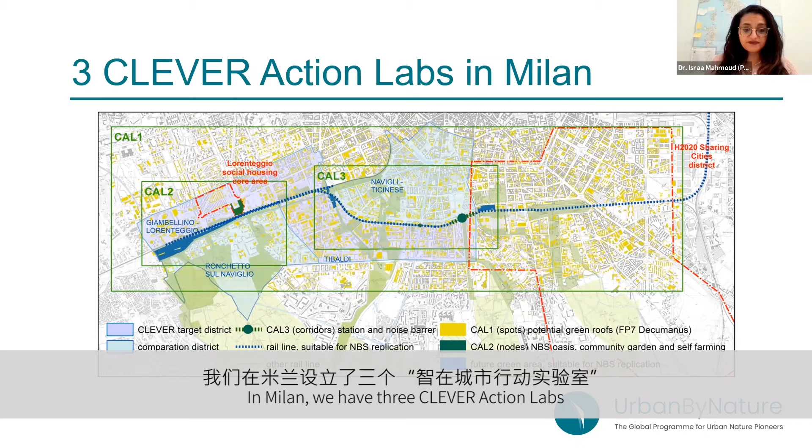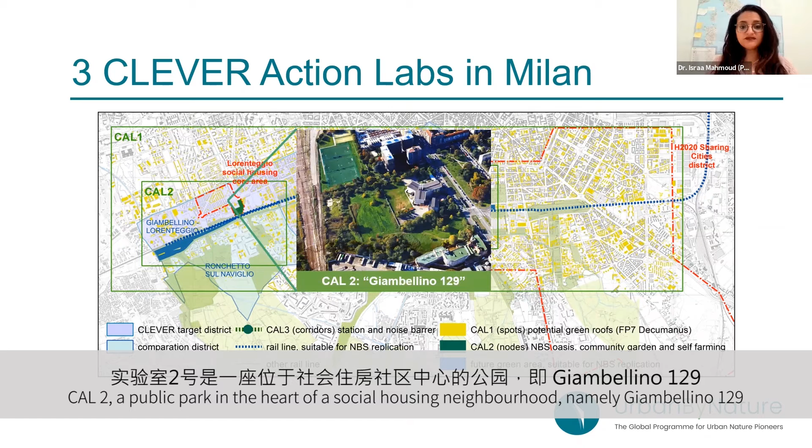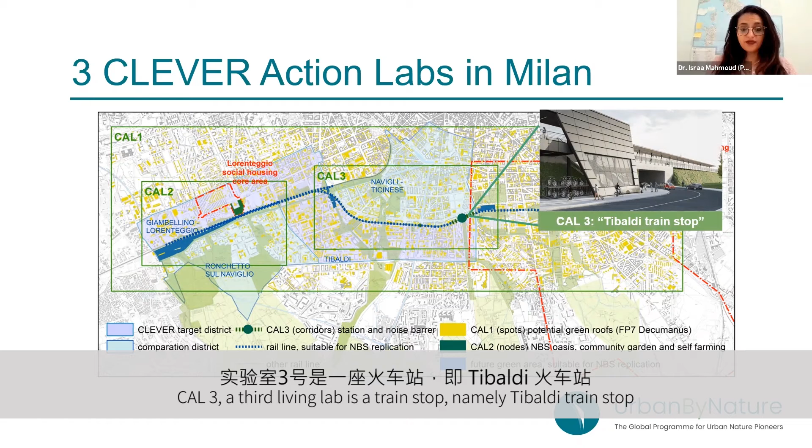In Milan, we have 3 Clever Action Labs. Clever Action Lab 1, Green Roofs and Walls Lab, namely Regreening Milano. Clever Action Lab 2, a public park in the heart of a social housing neighborhood, namely Giambellino 129. Clever Action Lab 3, a third living lab is a train stop, namely Tibaldi train stop. In the following slides, they will be explained in detail.

The focus of CAL1 lies on the design and promotion of innovative nature-based solutions, the experimental and multifunctional green roofs and walls. In support of the promotion of NBS, CAL1 has been developing an awareness-raising campaign. Its goal is not solely to increase knowledge about the importance of greenery in our buildings, but also to adopt a more strategic approach to public communication. It aims for the translation of this awareness into action, such as triggering a legislative change or supplementation, and helping drive professionals to employ green roofs and green walls in their building practices.

Since our pathway mainly aimed to be simple and easily adapted to different contexts due to its nature to be readapted in frontrunner cities, we learned by testing the pathway steps and tools that we did not need more than 5 stages for the co-design pathway.

For instance, in CAL1, the co-design pathway was readapted to the specific needs as follows: first, engagement of stakeholders; second, workshops of co-design; third, co-implementation of nature-based solutions; fourth, co-monitoring of NBS; fifth, upscaling of the solutions and replicability.

The focus of CAL2 lies on creating a new community garden in the public area located in Giambellino 129, previously abandoned and with contaminated soil.

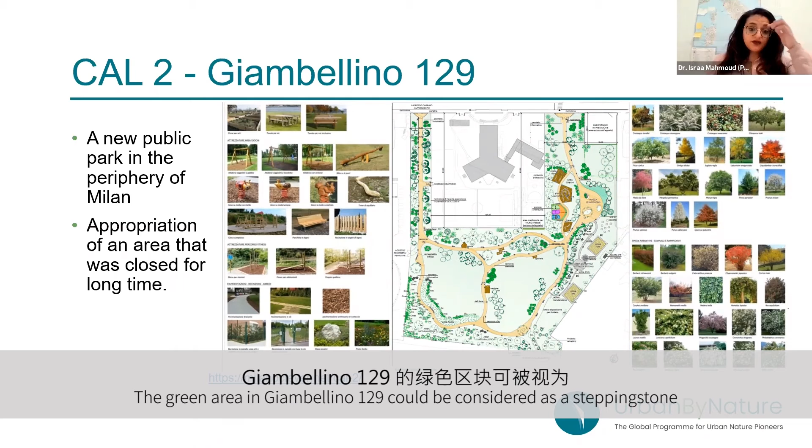The green area in Giambellino 129 could be considered a stepping stone in the green ecological network on the Milan Circle Line railway sites.

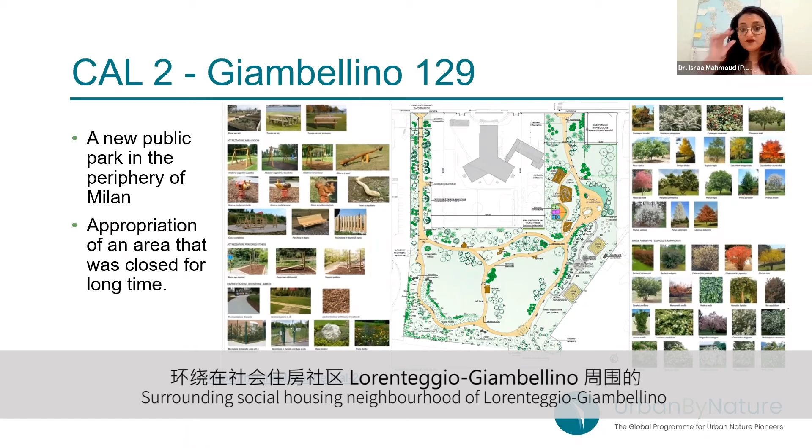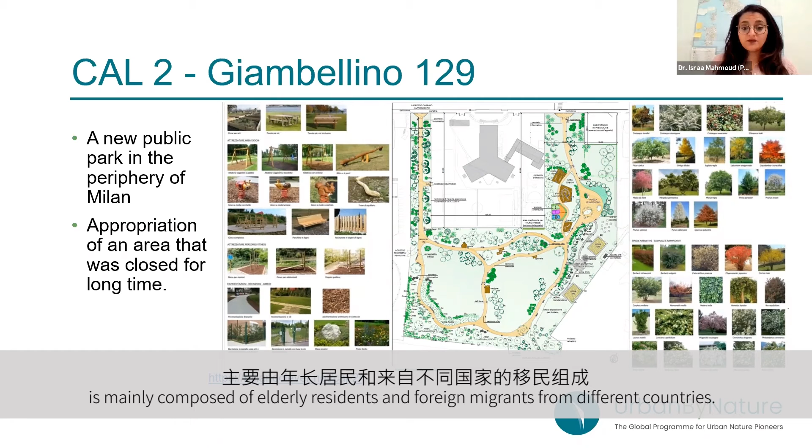The surrounding social housing neighborhood of Lorenteggio-Giambellino is a dense residential area with a strong need and lack of green and shared spaces. The social context is complex - Lorenteggio's population is mainly composed of elderly residents and foreign migrants from different countries.

Afterwards, we also readapted to different formats of workshops, in person and online, based on the need for conducting co-design and participatory workshops for the NBS interventions.

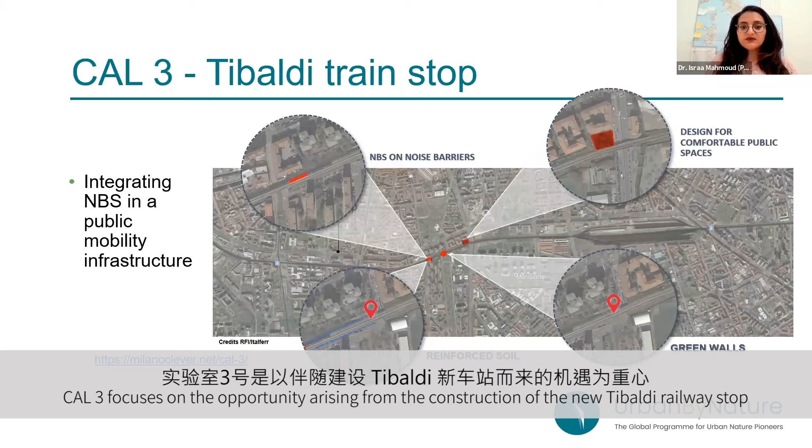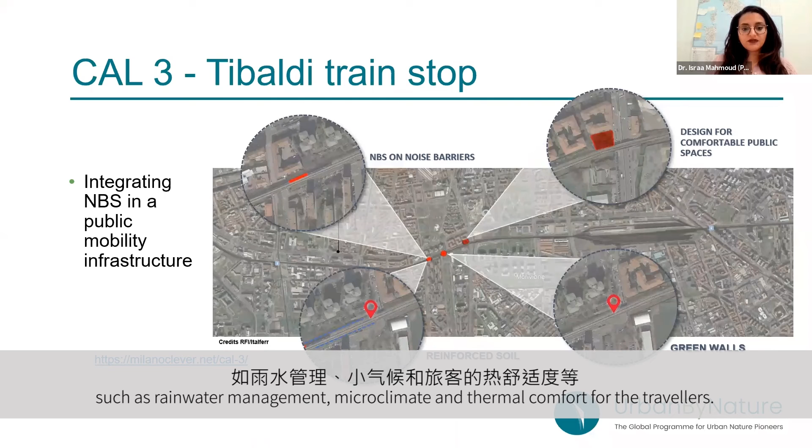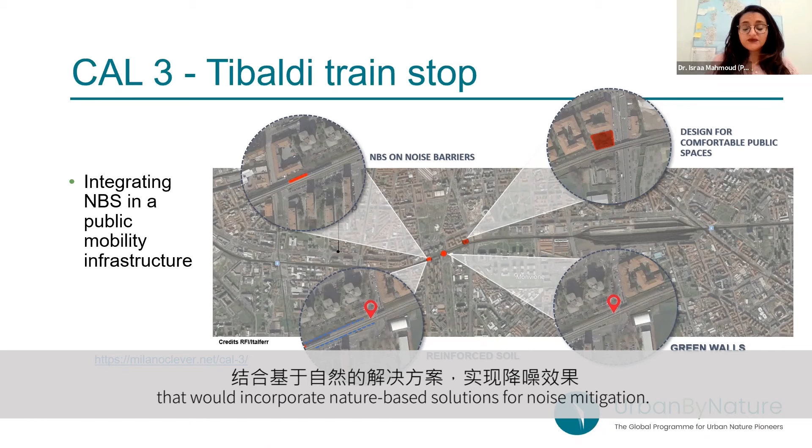CAL3 focuses on the opportunity arising from the construction of the new Tibaldi railway stop by working on a 3-fold program: first, improving the station's environmental performance, such as rainwater management, microclimate, and thermal comfort for travelers; second, allowing the continuity of the ecological corridor for biodiversity; and third, introducing groundbreaking standards that would incorporate nature-based solutions for noise mitigation.

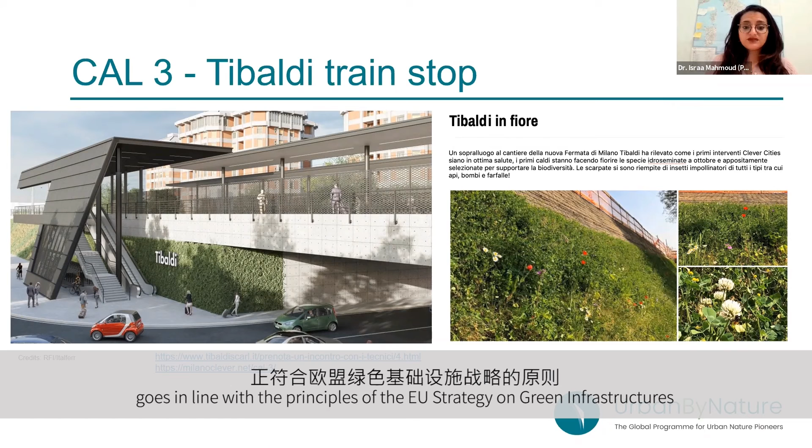The experimental integration of NBS in railway infrastructure goes in line with the principles of the European Union strategy on green infrastructures, which help enhance health and well-being, provide jobs, and deliver many benefits from nature to citizens.

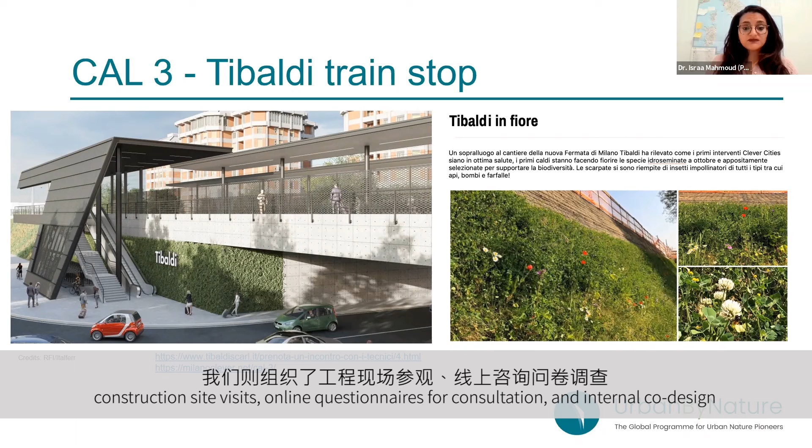For the co-creation of CAL3, construction site visits, online questionnaires for consultation, and internal co-design workshops to design the public space in front of the new station were carried out.

So, what did we learn from the co-creation process? Which challenges did we face in the 3 Clever Action Labs? The process of co-creation is never linear.

The alignment between the co-design, the co-implementation, co-monitoring, and co-management was a big challenge for the project, especially during the COVID-19 lockdown in Milan. Hence, we learned that the process should always be resilient to unpredicted events, such as COVID-19, delays in construction or administrative procedures, and public procurements, as well as new emerging opportunities.

For instance, we had to move online due to the pandemic situation. So now we hold online co-design sessions using tools such as Miro boards to share our ideas and thoughts with stakeholders. Social media campaigns were also carried out with targeted users in order to reach out to a wider citizen base during the health emergency.

However, we continued to carry out dissemination and communication events raising awareness on the public debate of NBS co-benefits, also after the pandemic situation.